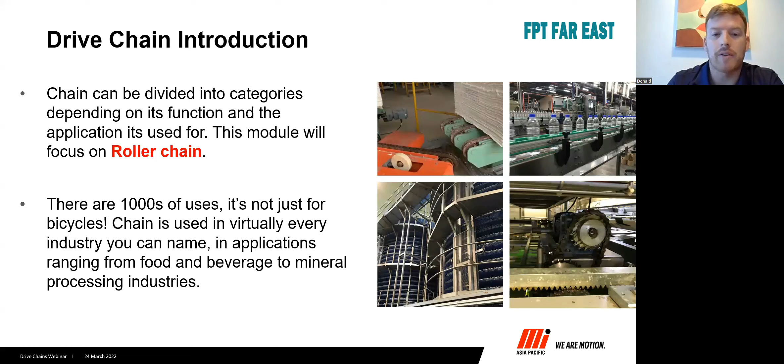Industries are very wide, very broad, from pulp and paper, steel, food and beverage. There's many areas that chains are used. A personal favorite for me is in the bakery industry, where you make bread. There's something about the fresh bread smell, and they use a lot of chains in those type of industries for the various reasons of the application demands.

As you can see here, a standard drive arrangement would be a drive sprocket and a driven sprocket. The reason you would use chains is to deliver positive power - so power, torque, and speed, these are all related. With a chain and sprockets, you can also have a drive speed ratio, which means you can change the speed between 2 shafts.

Chains typically that we're going to look at as the driving is used for transmitting power. So on a motorbike, you have power from the engine being transferred to the rear wheel - that's the same concept. The interesting thing about chains is that they are synchronous, so the rotational speed can be different, but the timing is the same between the 2 shafts that are connected by chain. So synchronization is important for some applications.

It's not exactly accurate because of the clearances between the chains and the sprockets. So if you do need very accurate synchronization between 2 shafts, you probably have to use a different type of chain. We have something called a timing chain, quite specialized, used in automotive industry as well, in the engine of a car, and those are more specialized. So we're going to focus on the industrial, more catalog-based drive chains this morning.

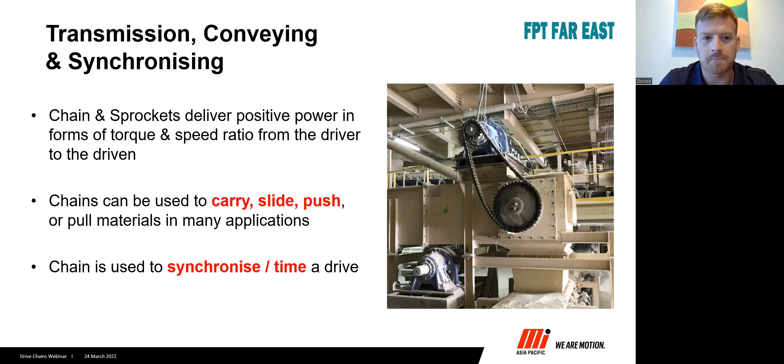Okay, what does a chain look like? Very basic construction, pretty standardized and uniform. So what we would look at is you have the roller link, and this is alternating between a roller link, a pin link, a roller link, and then to connect all of these things together, a connecting link.

Each piece of chain is made up of a pin, which you can see here - let me draw and highlight. So here it is, your pin. Those are uniform and standard - the pins are the same across the chain. When we manufacture them, they're uniformly made, typically alloy steel with some heat treatment to give them the strength needed to transmit the power.

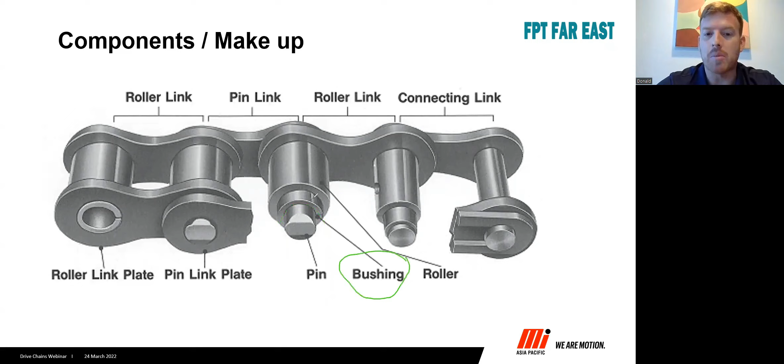Then you have the bushing, which is over the top of the pin here, and of course it rolls - it's loose, and it can roll freely and independently. The bushes here are press fitted into the inner link, so they do not move in the inner link. You have 2 bushes, and that then is slipped over the pin, and the pin here is press fitted into the outer link plate. So what happens then is your pin rotates inside your bush, and this is how the chain is able to articulate and move freely.

Then your roller can run and roll free. The reason you have these rollers is when you engage with the sprocket, the rollers then sit fixed and steady in the sprocket, and the bush rotates within that roller as the chain articulates around the sprocket. So those are pretty important things, and it's important that the uniform size and shape of each of these components is maintained. I'm sure you've heard the phrase, a chain is only as strong as the weakest link - and that's exactly true.

If one of these pins is sub-quality or there is a heat treatment issue, the whole chain is useless. If there is a roller that is not up to the level of quality, the roller fails and the whole chain fails. If a link plate has some issues, maybe there's a material defect, that link breaks and the whole chain breaks. It's very interesting, with that phrase: a chain is only as strong as the weakest link. So it's important to have uniform quality control when making these components.

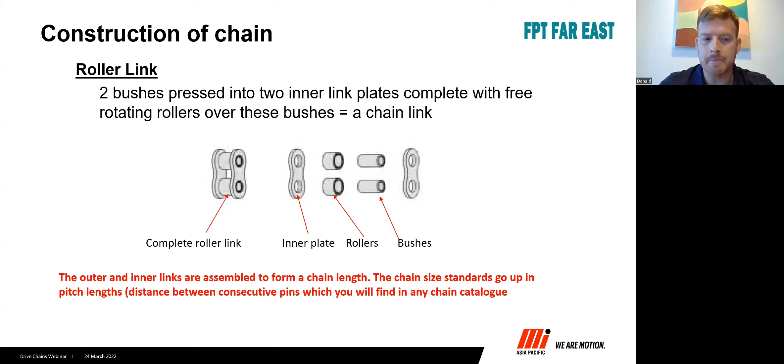We then have a pin link, which consists of 2 outer plates and 2 pins. These pins are press fit into the link plates, and then the head of the pin is riveted, basically mushroomed over or bent over through a process of riveting. This means the pins are slipped through the bushes and then press fitted into the link plate. That's during the assembly process. There are other ways of securing the pin to the link plate, and I'll explain those shortly.

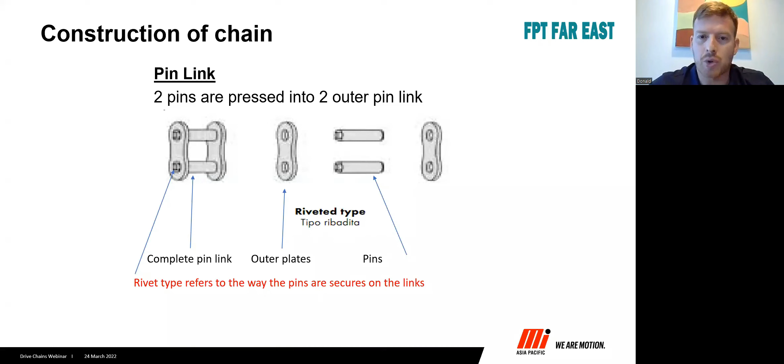Some of the techniques we use for the standard link plates are usually riveted for the standard assembly process. But to make it easier for shipping, storage, and uniformity, a standard length of chain is usually 10 feet or 3.048 meters, and that is a standard adopted globally. Oh, my apologies, chains can be made in different lengths. You can also manually cut them yourselves to whatever length you need, and I'll show some examples of long length chains later.

To connect a chain, you need a master link or a connecting link. These two terms are often used depending on which part of the world you are in, so connecting link or master link, they're generally the same thing. A connecting link is the most commonly used, and each standard box of chain, 10 feet, has 1 connecting link inside. There are different types of connecting links. The standard is usually this spring clip design. There is also the cotter pin arrangement, usually more available on request. Then we have the standard offset link, and I'll try to explain what that does in a moment. These are common items you can buy as an aftermarket, and if you need more master links, they're usually a common standard part number. All of this information is in our catalog, and I'll show that to you in a moment.

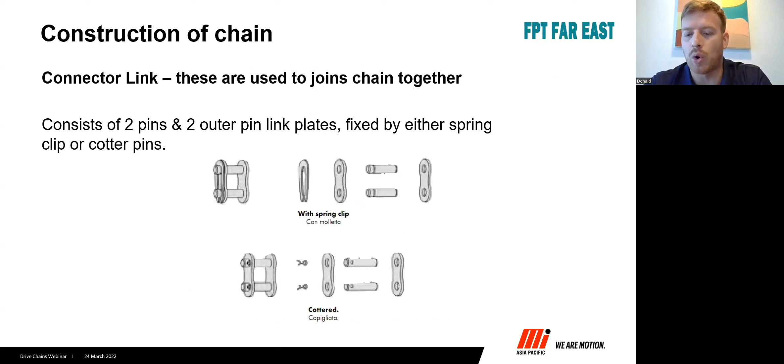Connecting links are usually the weakest point of a chain. In some applications, it's recommended to use a riveting style connecting link, which requires a bit of tooling during manual assembly to close the chain into a loop. Those are more specialist. So if you have problems with connecting links failing regularly, we could probably give you some advice as to what the root cause is. Bear that in mind.

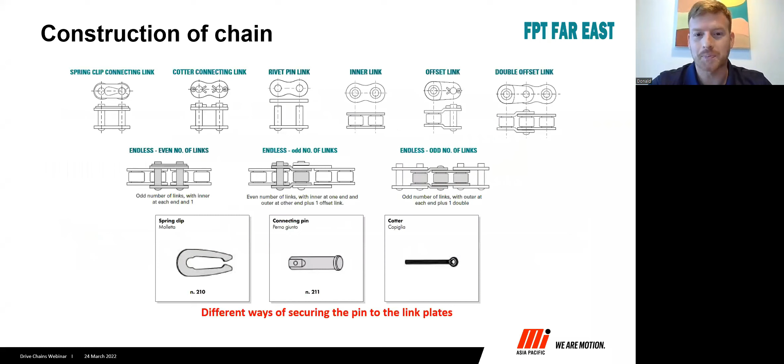We also have a half link, which is quite unique: this is a bush with a roller and a pin in one link. The reason this is used is to create a chain length that is an odd number of links. As I mentioned earlier, a chain has inner links, roller links, the pin link or outer link, and as you can see, it's alternating. This means if you close the loop and count the number of links, you would have an even number.

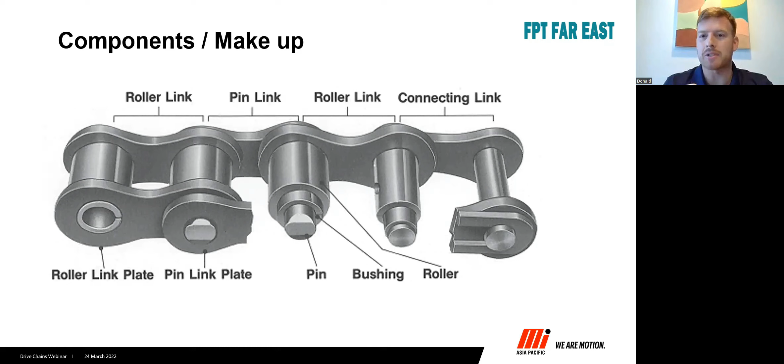But that means that the length is then dependent on that even number. In some applications, the length needs to be shorter, but you have to use an odd number of links. And that's where this half link or crank link is used.

Please bear in mind that the cranked link also has some strength reduction, and depending on the application, this is not advisable for some uses. But you can apply it to most general applications. If you need the chain to be shorter, you can use a half link to shorten the chain by only half a link, as opposed to removing two links and reducing the chain even further. So it's about the length of the chain that you need.

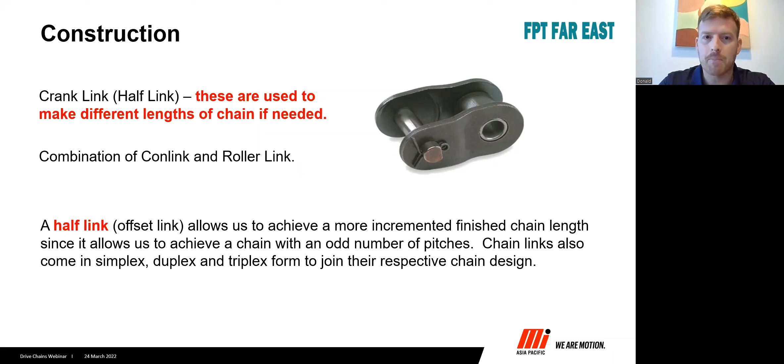So here is what the pitch is. I've been speaking about links. In our lingo, a link is a pitch, the same concept, so one link is equal to the pitch. The reason pitch is used is that it's a finite distance measurement between the two pins of a chain.

This will become more clear when I show you the catalog page, because we have various international standards that are applied, and that govern the dimensions of the chain. The pitch is just one of the dimensions governed by the international standards, and that's quite important when considering a selection, and also when considering reordering something that you have. Usually you need to identify what you have, and one of the criteria is the pitch.

The reason I'm focusing on pitch is that maintaining the pitch of the chain during production is very important, because the more accurate you can maintain the pitch, the better the quality of the chain. There are some allowances, because as I showed you the components, there are lots of components, so each needs to be machined and manufactured very accurately to give you a uniform pitch. The reason that's important is if your pitch is too variable, it does not interact or engage properly with your sprockets, and then you have noise issues and problems with the service life.

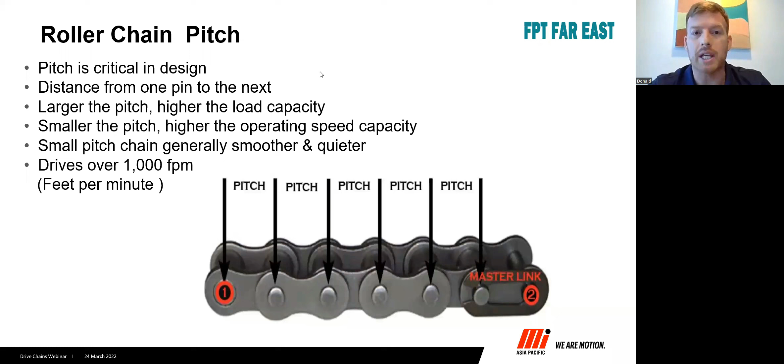So when we look at identifying chains, whether for doing a selection or identifying what you have on site for replacement, we need to identify the size of the chain, and these are important dimensions. The pitch, that is the distance between two pins, and the way we do that is by using our vernier to accurately measure the pitch between the two pins.

The next dimension important is the width between inner plates. Let me highlight those here so that you can see exactly which ones I'm talking about. So this dimension here, which is the inner plate, let's make this a bit bigger - there's your inner plate. Now we need to measure the distance between those two plates. That's the second important dimension.

Next is the roller diameter. Please bear in mind that if a chain is worn, possibly the roller diameter might not be exactly what the catalog shows, because there might be some wear on the outer diameter, and the same goes for the pitch. So if the pitch you measure is not exactly what the catalog is showing, as long as it's close, this typically indicates that it's a standard close to that of the catalog.

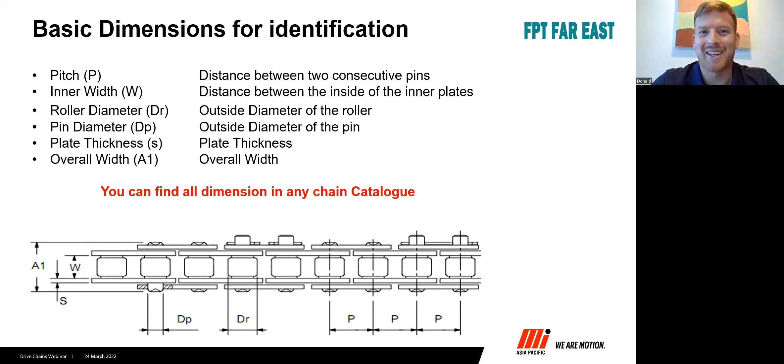So some chains, and again, over the years there have been developments. These are just the basics, I need to be clear on that. There are many other series of chains available now, and this is a kickstart.

Typically standards, you would see a simplex, one row one strand, duplex, and triplex. These are the most common number of strands we see in industry. In oil and gas and some heavy applications, they might have more strands, wider, and those are designed specific for those applications. And as you can see, they're pretty useful executions, because you can have basically the same strength rating doubled in almost the same dimensional envelope.

So chains are quite versatile with that. If you select on one chain and you need to increase the power rating, you can often just go to 2 chains. So it just becomes a little bit wider, but the diameter stays the same.

So typically a single strand would just be 1 row with pins across and 1 set of rollers and bushes. A duplex will have, it's basically 2 simplex chains together with 1 long pin. The pin extends all the way across, so it's longer pins. The bushes and the rollers are still the same length effectively, and then you have additional link plates through the middle. So the difference is that you have a long pin joining.

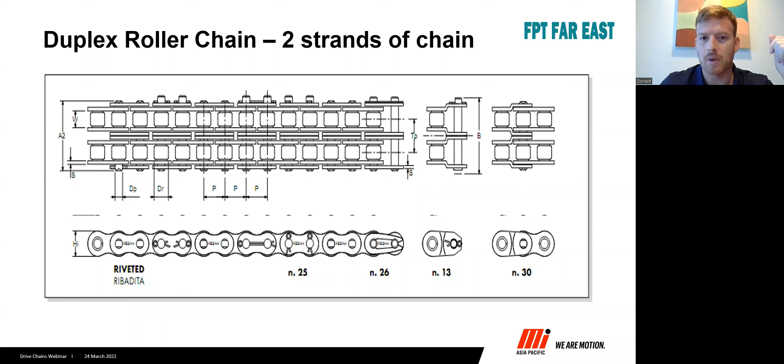Okay, and then triplex, it's the same concept. We add another row of chain, and we just increase the chain width. And this is the pin effectively, a long pin all the way across. And that's the difference. So the bushes, the rollers are still the same length, those are all common standard dimensions for the chain. We just add these longer pins that connect a triplex chain.

The same goes for 4 rows, 5 rows, 6 rows. We can go quite wide. And I'll show you an example of some of those.

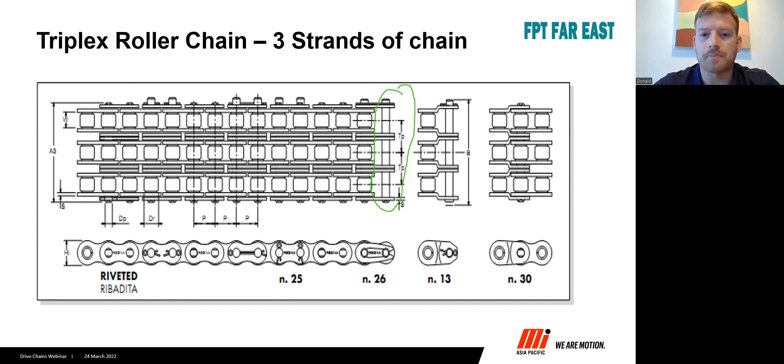Okay, hold on a second, let me just get rid of my annotation. All right, so there's 2 common standards in industry. I'll talk about a third, but the most common we see is your British standard chains and American standard chains. American standard chains typically have specific part numbers, and I'll show you some of those now. Most common in Asia Pacific is your American standard roller chains. There are some original equipment manufacturers that use British standard chains, and I'll show you the difference between them as an example so that you can understand why one is selected and not the other.

Please bear in mind there is an overarching ISO standard for chains, ISO R606. There are a few revisions of that. There is a German standard DIN, the BS, and an ANSI. These standards govern the dimensions of the chain as well as the tensile strength, which I will explain shortly. The reason these standards are important is because a chain, to be called a certain part number, must conform to these standards. If it doesn't, then the chain cannot be labeled that part number. It needs to be something different.

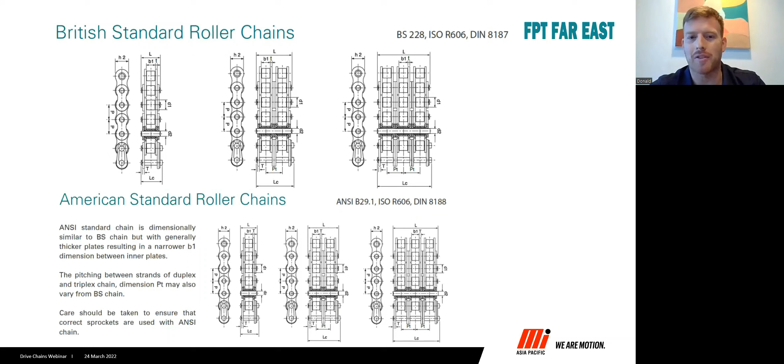So all of this information is in our catalog, we do show exactly the dimensions that are shown here. And this is just a snapshot of our catalog. I'll show you that link for the catalog later.

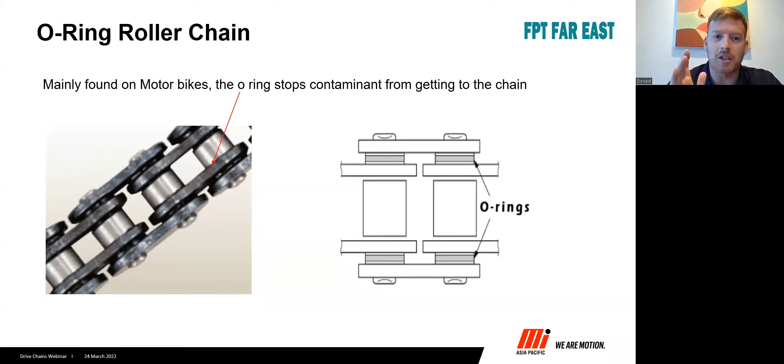Just as a side note, I mentioned motorbikes earlier. So motorbikes have quite an interesting design feature to increase the lifetime of the motorbike chain. Manufacturers have installed little O-rings to seal the chain, and this helps to keep lubrication between the pin and bush. Usually with a motorbike chain, you can't put too much lubrication on the outside because it goes everywhere and puts oil over your bike and over your legs and so on. So to keep it a little bit drier, the inner workings can be sealed off, so lubrication is held between the pin and the bush. This is also applied to some specific special industrial applications. So just a side note there for you.

Typically, I'm sure you recognize chains articulate. They bend, but they bend in one direction, in one plane.

There are more specialized chains designed to curve in a different direction. The normal articulation would be in one plane, but a side bow chain can curve as well. This is very common in food and beverage applications for conveyor systems. I thought I'd highlight this one - it's a design feature that allows the chain to curve, quite unique.

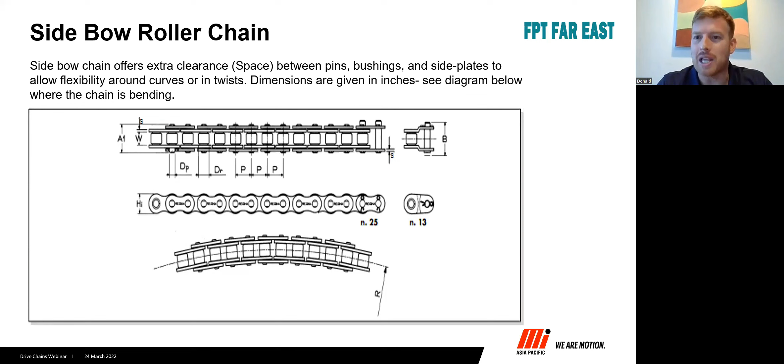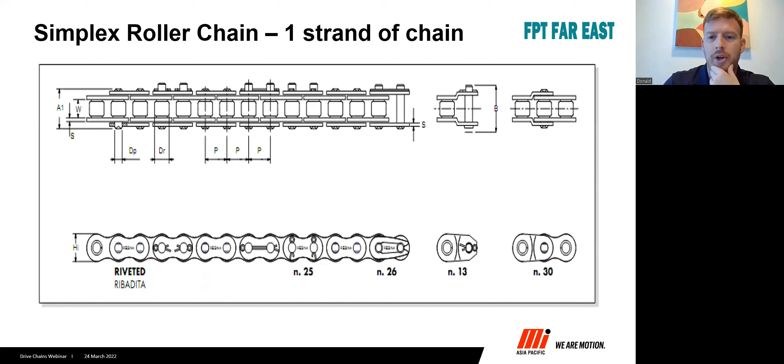I pulled this one as well. We have your standard chains, which you can see here - has a figure 8 shape, effectively. That figure 8 shape we call a waisted sidebar, and the reason is because it saves material. The shape almost looks like an infinity symbol. It's a waisted sidebar, and it's used because it reduces the material used on the side plate and also reduces the weight of the chain. Over the years those dimensions have been optimized so the chain has material where it's actually needed.

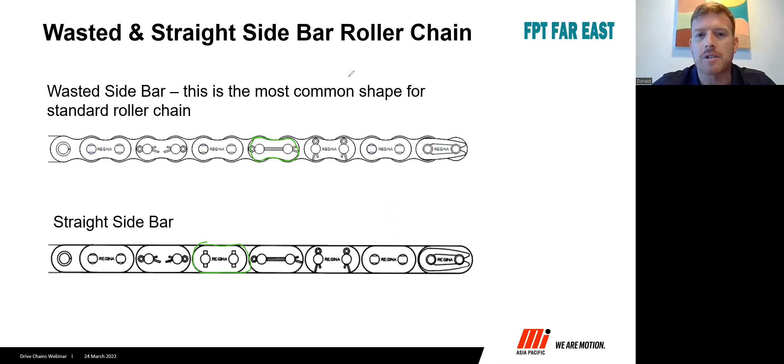There is also a straight sidebar. This is very common for conveyor applications where you need the product to rest on a flat surface. The straight sidebar is also used for heavy duty applications, but I'd say it's mostly used in conveyor systems.

There are, as I mentioned, a lot of executions, so I just wanted to show a few to get your creative juices flowing. If you have questions on these - there are chains used in packaging machines that use extended pins, where you might have little rollers or attachments joined onto the chain. Chains can be quite versatile and used in various applications.

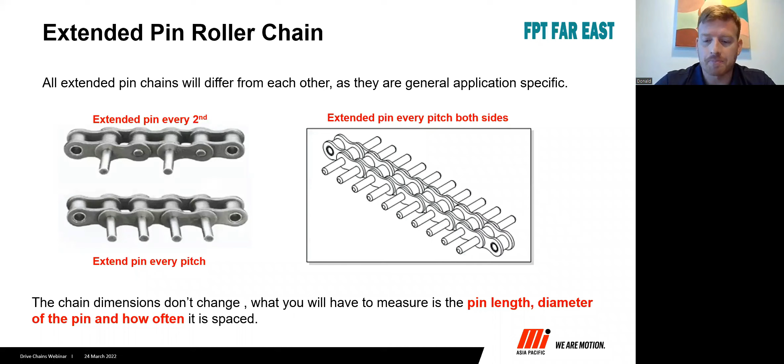They also can have attachments. The chain side plate, which is that waisted side plate design, can also have - when you make the side plate - an attachment, either a bent attachment or a straight upright with some holes. Then you can attach whatever you want to it. This is very common in food and beverage and other fast-moving consumer goods manufacturing industries.

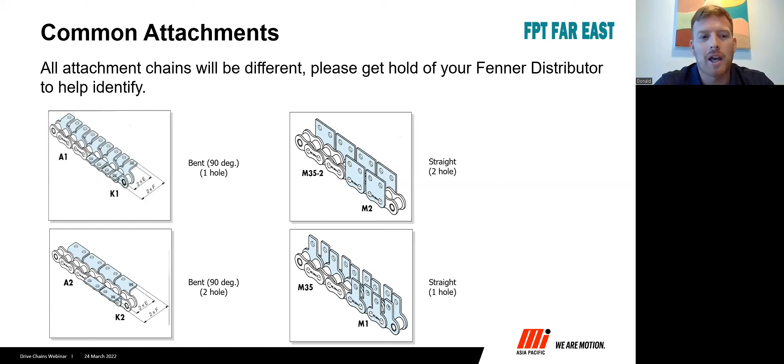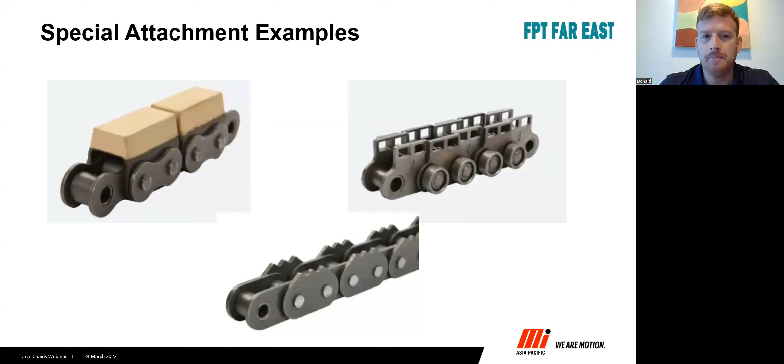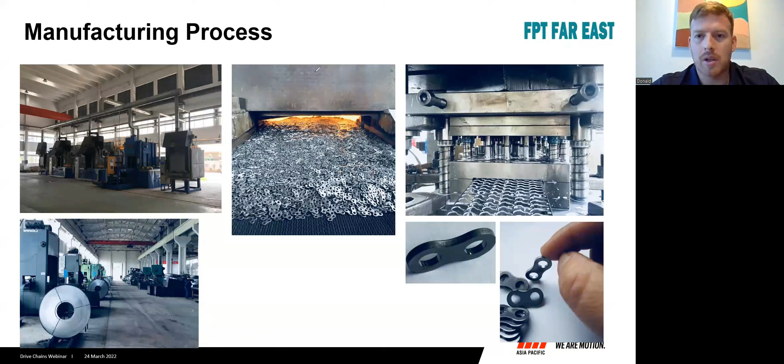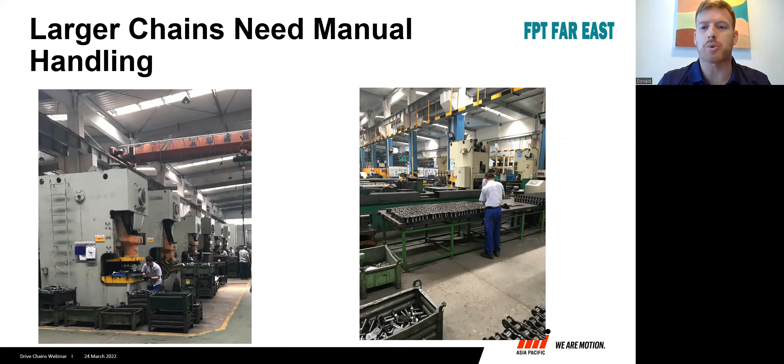Just to highlight, the process for the smaller chains is mostly automated - there are a few processes involved which I won't get into today. But as your chains get bigger, it's more difficult to automate a lot of this, so there's still some manual handling required. You can see from the photo the size of the chains that are standard catalog, but the sizing is quite large, so those typically get pre-assembled by hand and then go through various processes for the final assembly.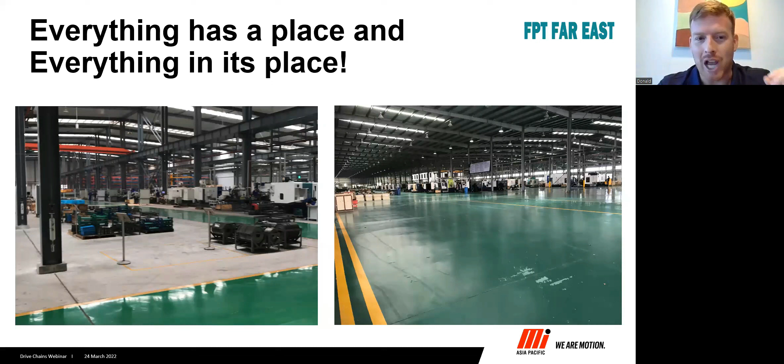I like to show this: everything in its place, and everything has a place. So clean floors, demarcated areas, batch control. This is what a good manufacturing process looks like when making something like chain, because a chain is only as strong as the weakest link.

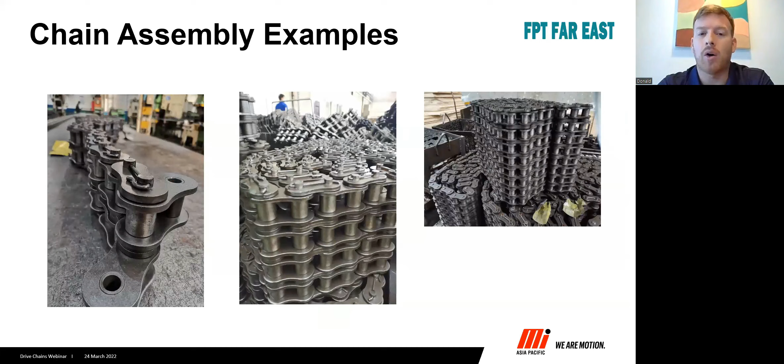Okay, and here's some finished items. I mentioned that there are more rows possible. This chain is for the oil and gas industry and has some specific API requirements, and usually this type of chain is used in quite wide rows for specific oil and gas applications.

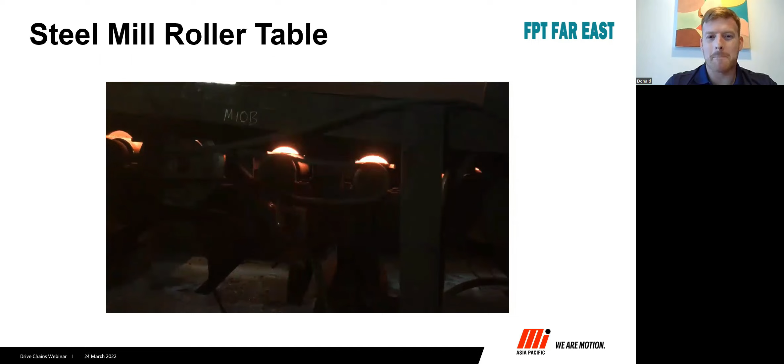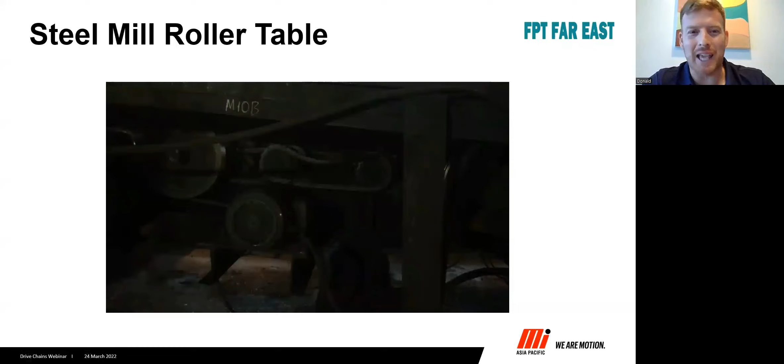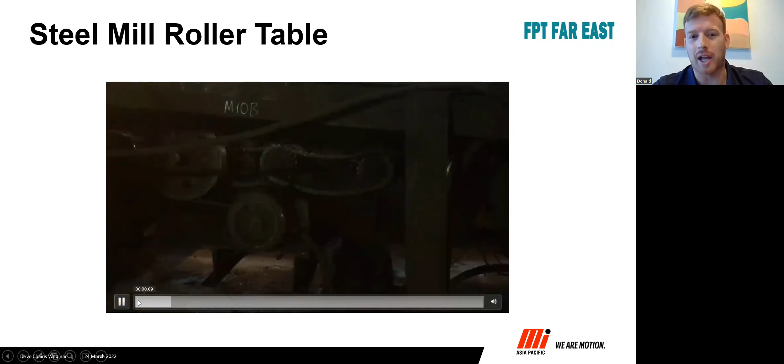So I'll just do it one more time. So for those of you that didn't catch it, this is a steel mill. It's molten steel coming out, hot steel bar coming out across rollers, and the rollers are being driven by chains, by drive chains. So you can see a dark, dirty, dusty environment, and here comes the... all right, so this is the type of area that chains are expected to operate in.

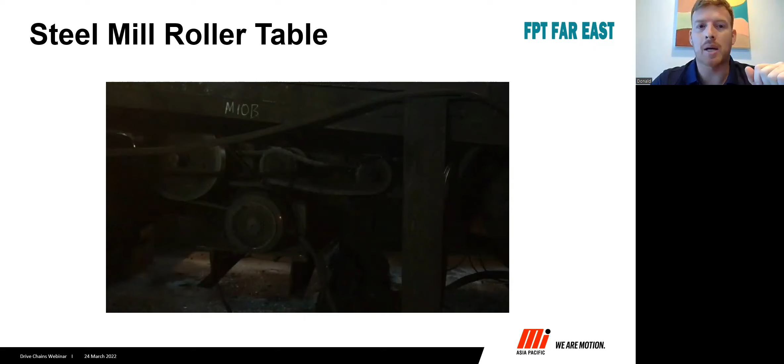Very harsh, very heavy, immediate online direct starting. So that's why chains are used, because they are quite resilient. The materials in chains are resilient, and with a good selection, you can get quite good fatigue life out of drive chains.

So again, just to highlight some other areas you might have seen. On the left-hand side, a dusty and abrasive environment - this is a cement mill. There is lime and clinker and all sorts of abrasive dust in the environment that lands on the chain, so it needs to work and operate in that. A dirty environment on the right-hand side - this is, from what I remember, a painting line where they paint cans, and it's very much over lubricated, but for a good reason: a lot of the dirt clings to the outside and doesn't go into the working components.

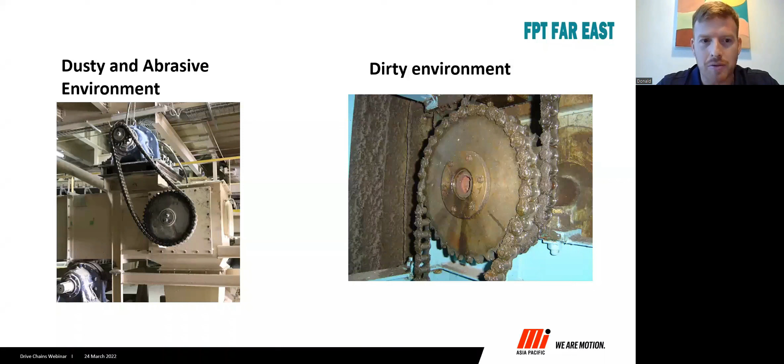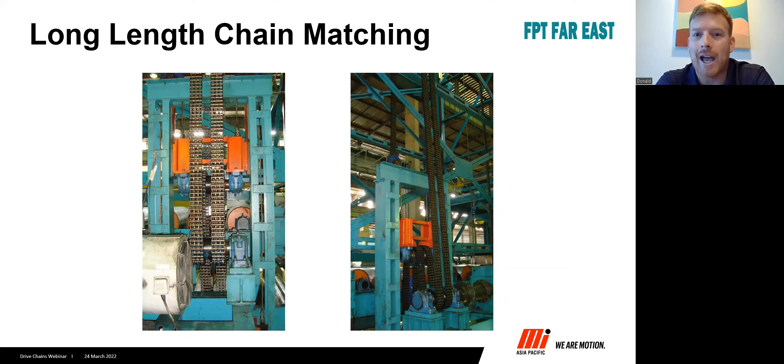So quite interesting, demanding applications for chains. I mentioned in the beginning that there are applications with long length requirements. This is called a looper machine or an accumulation machine, used in sheet metal for the galvanizing process. The chains then need to be assembled in very long lengths. Not only are they long length, they also need to be matched - the lengths need to be matched and accurate, because if they're not the same or accurate length, the loading is then not equal between the two chains, and this causes other process and operating problems. So for these more specialized applications, there are additional quality control checks needed and important considerations when doing the assembly and purchasing for these long length applications. But quite interesting to show this.

Onto lubrication. We've got a few more minutes so I'll rush through a little bit, bear with me. Lubrication, again, is a very important aspect of chain - it's a very wide field. Often lubrication needs to be specific for your application and maintenance requirements. But the general theory is you need to get lube in between the side plates and the clearance between the side plates, and into that working surface between the bush and the pin and the roller and the bush. Those rotating surfaces need lubrication and re-lubrication. So you can refer to our catalog, and if you do have more specific problems with lubrication, please feel free to reach out to us.

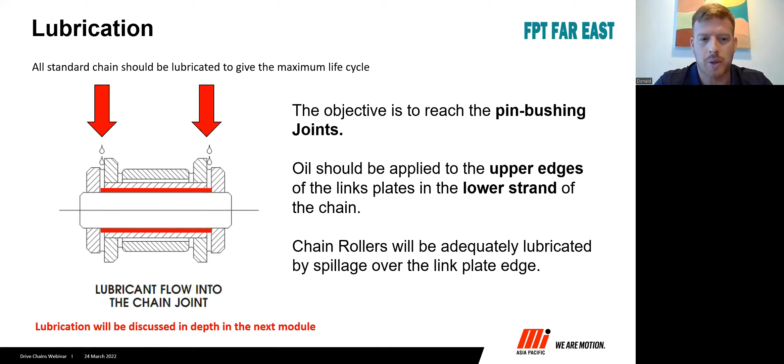It's usually lower speeds, and that's important to notice - at higher speeds you face lubrication issues and some centrifugal force challenges, so it's usually lower speeds. They can handle high temperature - it's metal, they can typically go up to above 250 degrees without too much challenge to the material structure. Once you get to higher temperatures, it's important to consult with us because there's usually some sacrifice on the strength of the chain. Okay, pretty durable - they can work outside, in wet environments, dusty environments, very durable.

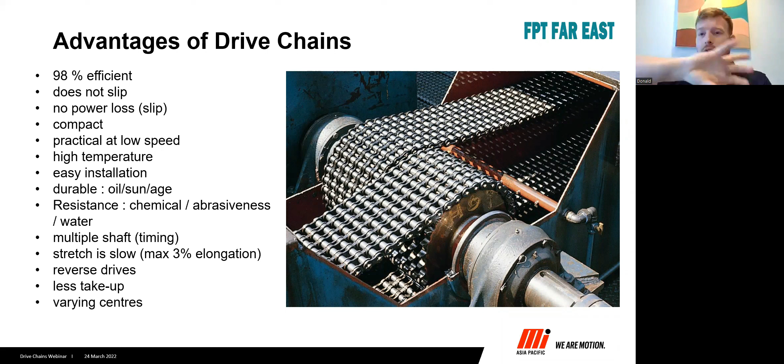And elongation, the concept of the chain once it's wearing out, there's quite a wide range of elongation allowance, which means the chains can operate for a long time. And yes, you can also use them to drive in both directions. If you have two shafts that need to rotate forwards and backwards frequently, you can do it with chains.

Some disadvantages: they can't be used as clutching. This is typically where you need slip, and if there's slipping that's needed, you can't do it with chains because it's a positive drive.

It's limited misalignment. You can't have major misalignment with chain because it's fixed and it needs to articulate in one plane. If you do need misalignment, usually that's specific applications where you would use possibly side bow chain, but then there's other requirements.

It does require lubrication - all chain does. There are some special series of chains that we manufacture and provide that are lube-free, but you can lube them to increase their lifetime. So those are more specialized.

And again, it does not dampen vibration. So if you do need vibration dampening, usually there's other requirements to the application, but chain won't dampen vibration.

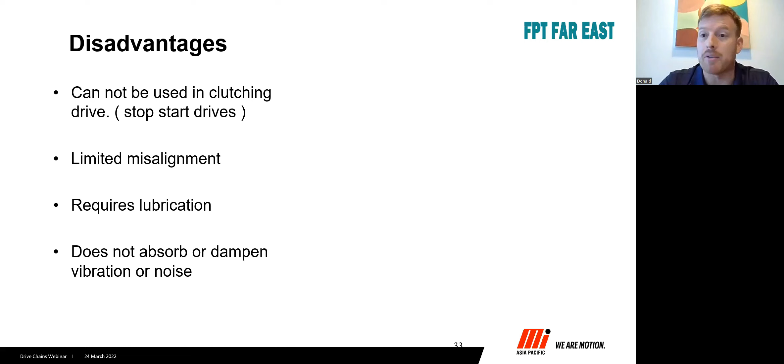Okay, then a couple of tips. If you've got chain that's an even number of pitches, you want to use a sprocket with an odd number of teeth. This combination of a sprocket with odd and the chain with even helps to increase the overall lifetime of the drive. I won't go into too much detail on why, but that's just a rule of thumb. Typically we don't go smaller than 12 teeth.

We do see 11 tooth, but usually that's not so common. Anything smaller, and there's other challenges with the lifetime of the chain and the lifetime of the sprockets. But common is anywhere 11 to 15 and 17. These are your common sizes - 13, 15, 17, 19 common sizes for sprockets.

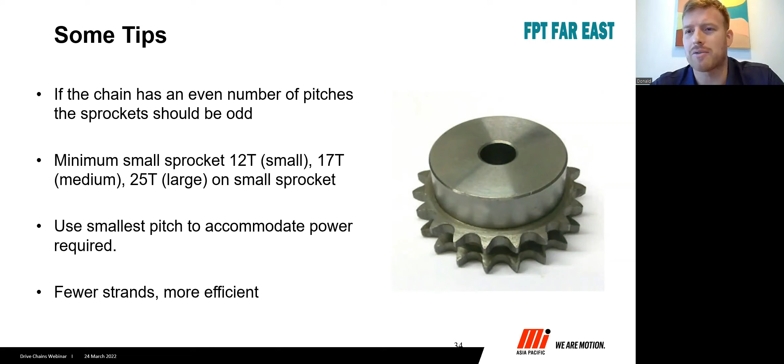Some facts about chain: they do elongate. Chain does not stretch. If you have stretch, it means the chain has gone above its maximum allowable tension, so the chain has actually gone into the plastic region in terms of the material. It's elongated in that sense, but because it's stretched, it shouldn't return back to its original length. So be careful on that.

But elongation is common with chains as the chains are operating. And the rate of elongation is something important to measure because that's your lifetime. It's what happens - your pins and bushes, they're rubbing between each other and they basically lose material. That's how elongation occurs.

So temperature, again, up to 315 degrees without too many changes to raw material or to the base material, and minus 50 degrees. But for those, you need to consider the type of lubrication. So if the temperature is really low, you need to consider the type, and if the temperature is really high, you need to consider the type of lubrication.

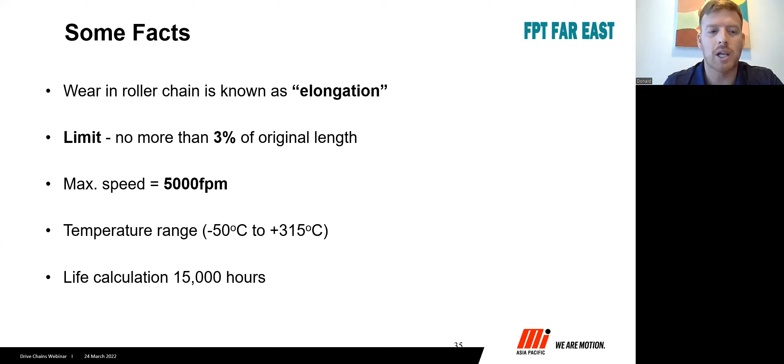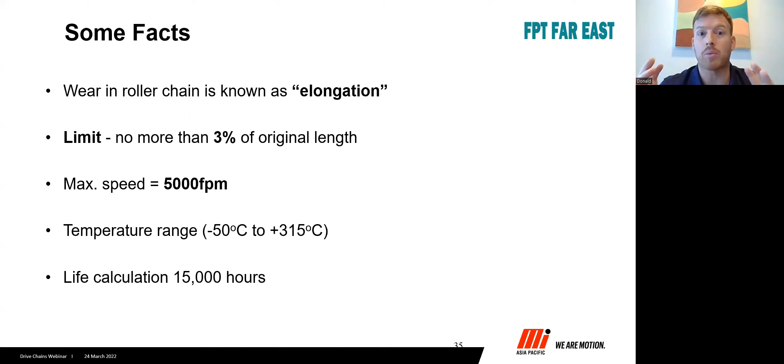And then we look at about 15,000 hours for operating life. That's a common gauge. That means if the drive is running very high speed and the distance between the sprockets is short, that affects your lifetime expectation. So then when doing the selection, you need to select appropriate chain that will give you a reasonable lifetime.

Okay, so I wanted to just highlight some of the concepts of tensile strength and allowable load. So allowable working load is a function of the pins and bushes and the amount of pressure that those pins and bushes can handle. And there's some combinations with the material strength of the side plates. Typically, we don't publish our allowable working load. Some of our competitors do, and some of the other brands in the market do, as good guidelines.

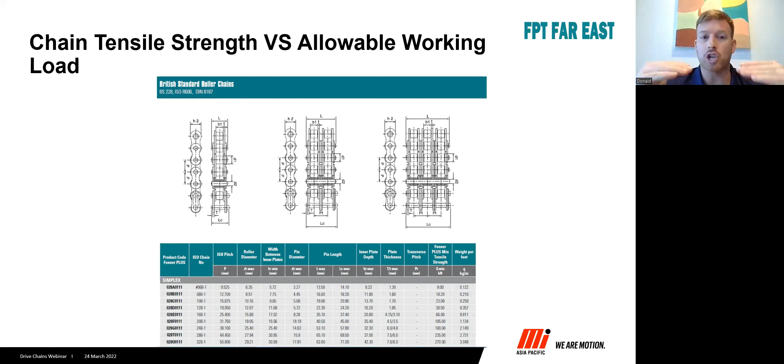But typically, we work on a safety factor, service factor system when doing a selection. So we list down our tensile strengths, which you can see on a catalog page, on the second column on the right-hand side. And that is then based on the individual chain size. British standard, American standard, most common that we have in the industries. What you'll notice is that the dimensions for pitch, which is the distance between the pins, there are standards, and all of them are inch standards, which means it could be 1 inch pitch or 1.5 inch, etc.

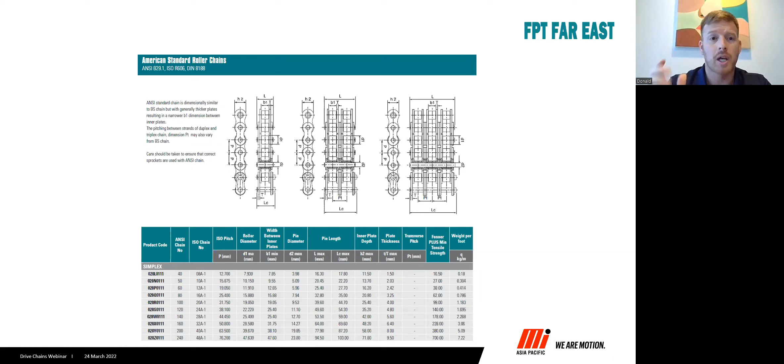There are chains made with metric pitches, but those are less common in the industry globally. Here's a comparison between a 16B chain, very common in industry, and an 80-1 chain. 16B is the British standard, 80 is American standard, and the pitch is the same. The roller diameter is the same, but the width between inner plates is different, and the pin is a different diameter. You can also see the tensile strength between the 16B and the 80 is different, and that impacts the weight of the chain.

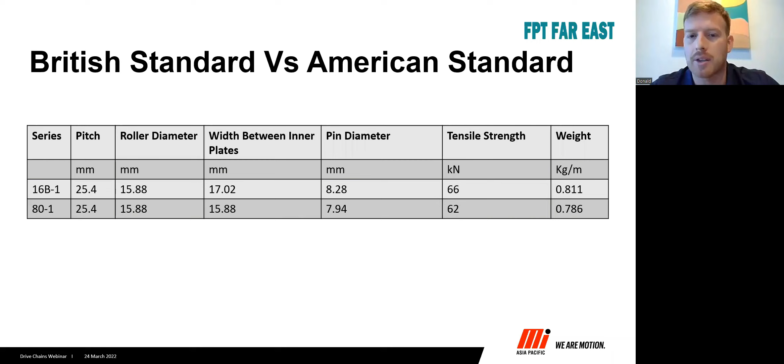So which one is better? The pitch is the same, the roller is the same, but the other values are different. Effectively, the 80-1 is usually a more economical chain, slightly cheaper than the 16B because there's less material used. But then your tensile strength, you have a sacrifice. Also your pin diameter is slightly smaller, so your wear life is also reduced, because if you increase the pin diameter, you can generally increase the lifetime of a chain.

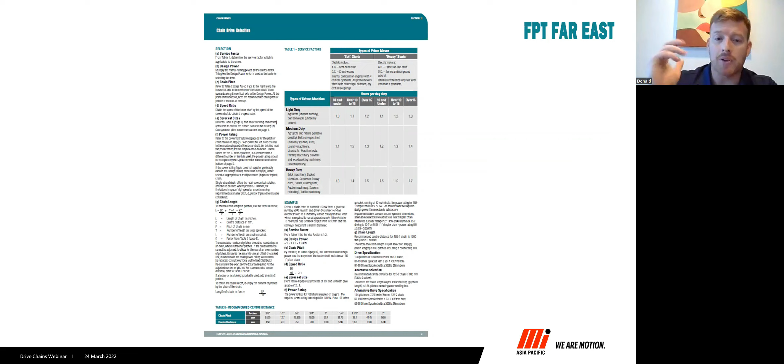So we do have a few more slides. I think I'm running behind schedule at the moment, and I just wanted to show you the selection process. I'll skip through a few parts, but this is available in our catalog, and we have the selection process in detail with an example. If you have some questions on this, feel free to reach out to us.

Here it is in more detail. I won't go through this yet, we are running short on time, so please feel free to have a read, and if you have questions, give us a call.

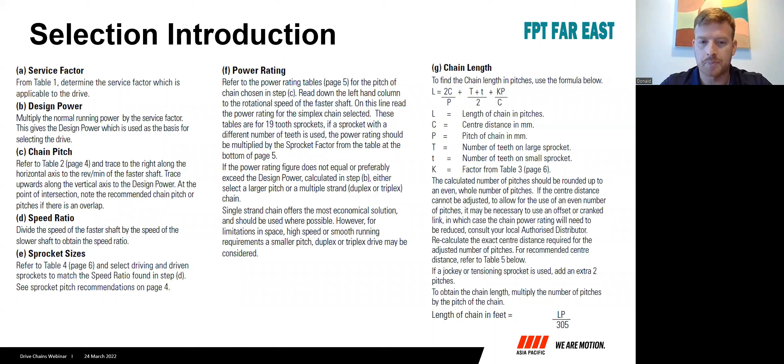So I would talk to this because I find it an important factor. We do have a quick selection chart on the right-hand side. If you know the speed of your faster shaft and your design power, you can do a quick chain size selection, roughly what size you should be using. But it all starts out with your service factor.

This is a guideline that we give in our Fenner catalog, and it's applicable to you as the customer or the engineer. You need to look and see what your application requires. If it's light duty, and that light duty is operating with heavy start, so direct online like the video we saw, and operating for more than 16 hours, we recommend a 1.3 service factor. So what that means is we take the installed power in kilowatts and multiply it by 1.3.

For example, if I have a 10 kilowatt motor, and I multiply by 1.3, I get 13 kilowatts as my design power. So that's probably somewhere here. I then trace the line across the graph, and if my chain is running at, let's use 200 RPM on the faster shaft, I would select something like in this range here - a 20B chain, or a 24B. So that can be your preliminary selection.

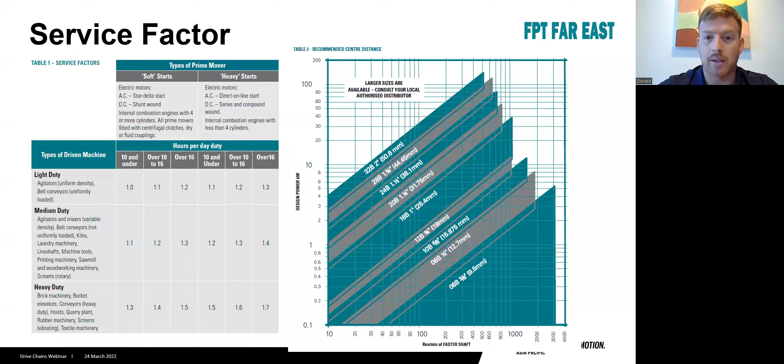Then we start going into more detail about the length, the sprocket diameters, and we have those in our catalog, which are there to help you complete that selection process.

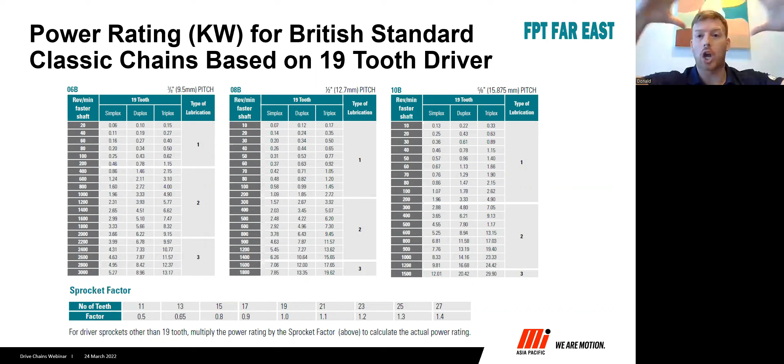Here are some guidelines on the sprockets, where we look at the sprocket sizes and the power the sprocket can handle. So we start out with a chain, get a rough idea of what size chain we think we need, then go to the sprockets and work out roughly the size we need, considering the envelope of the application, which is the space limitations. Then we start filtering down to a workable chain selection.

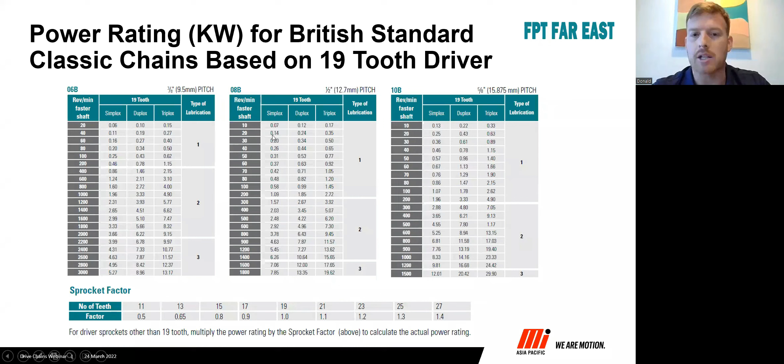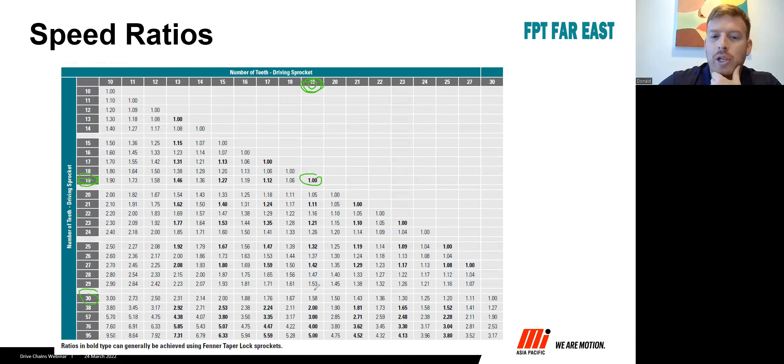We also have the ratio, which is the change of speed between the two shafts. This is just a quick guideline on the sprocket. So if you have, for example, a 19 tooth and a 19 tooth, your ratio is 1 - pretty straightforward. If you have a 30 tooth and a 19 tooth, your ratio is 1.58. That'll be the speed ratio change. This is in our catalog for reference and ease of use.

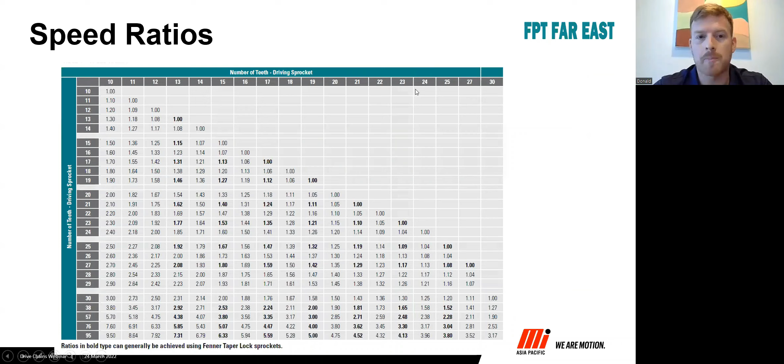We then also need to have some areas where we change the pitch of the chain into the length of the chain. I won't get into too much of that now.